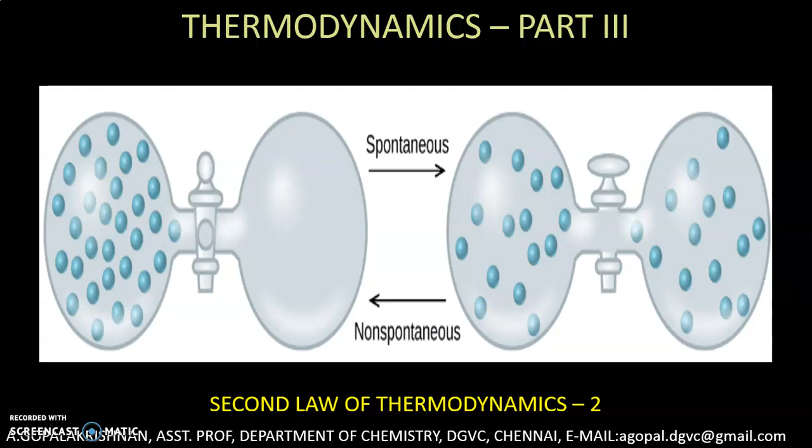In this lecture, I am going to introduce the second statement of second law of thermodynamics called Clausius statement. Actually, we have various statements of second law, but I am going to introduce only a few statements which are very important for our course. Okay, so what is Clausius statement?

See, heat transfer from low temperature reservoir to high temperature reservoir does not occur spontaneously, but using a heat pump we can transfer heat from low temperature to high temperature. But if you want to transfer heat from low temperature to high temperature, you must do some external work.

Suppose consider a heat pump which is operating in a cyclic manner. This heat pump absorbs Q1 amount of heat from the low temperature reservoir, and we carry out some external work so that heat transfer occurs from low temperature to high temperature. Now the heat that is transferred to the high temperature reservoir is actually Q2. Q2 is not equal to Q1. Actually Q2 is equal to Q1 plus the work done on the heat pump. So Q2 is equal to Q1 plus W.

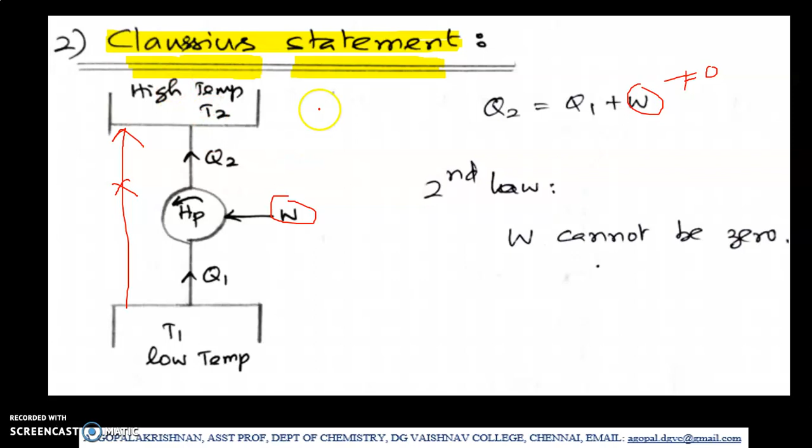Here what second law says is that this W cannot be 0. That means without doing external work, it is not possible to transfer heat from low temperature to high temperature reservoir, from cold end to hot end. Are you able to follow? This is very simple. If you want to transfer heat from low temperature to high temperature, you must do some external work. Okay, this is the Clausius statement for second law of thermodynamics.

Now this is the formal Clausius statement. What is it? It is impossible to construct a device which, operating in a cycle, will produce no effect other than the transfer of heat from a cooler to a hotter body.

See, without producing any effect in the surrounding, it is not possible to transfer heat from cooler to hotter body. That means you have to perform work externally, so that the surrounding loses some energy. So without doing any external work, it is not possible to transfer heat from cooler to a hotter body. This is called Clausius statement.

Now from these two statements, Kelvin-Planck statement and Clausius statement, we understood that in the transfer of heat to work using a cyclic process, you can transfer heat into work, but the work obtained will be less than the heat absorbed. So you cannot convert heat energy completely into work. 100% conversion of heat into work is not at all possible. So heat energy is considered as low quality or low grade energy, because 100% conversion is not possible.

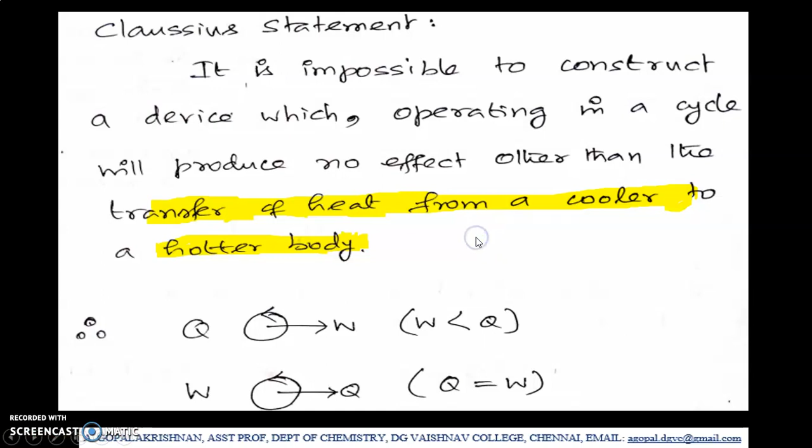Okay, then what is meant by perpetual motion machines? These are all hypothetical machines. Here we have two perpetual motion machines. The first one, perpetual motion machine of first kind. What is meant by this?

There can be no machine which would continuously supply mechanical work without some form of energy disappearing simultaneously. What is the meaning? Suppose I have some machine. If I supply electricity, the machine will convert electrical energy into work. If I supply chemical energy, the machine will convert chemical energy into work, solar energy into work, wind energy into work. Now, without supplying any of these, if a machine can produce work continuously, we call that type of machine a perpetual motion machine of first kind.

But in nature, in practice, we don't have this type of machine. This is not at all possible because this perpetual motion machine of first kind is a violation of first law. What does first law say? That we can convert one form of energy into another form. Without supplying this energy, if a machine can produce work, it means energy can be created. It is the violation of first law, because we know very well, according to first law, energy can neither be created.

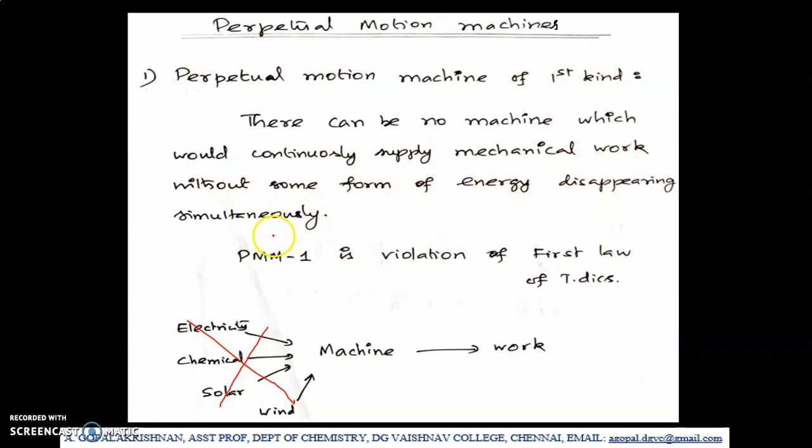Okay, then perpetual motion machine of second kind. What is meant by this? A machine which absorbs heat from a single source and converts it completely into work. Okay, what is the meaning of this? Listen, we have discussed just before. In Kelvin Planck statement, we saw that a machine cannot convert the absorbed energy completely into work. Complete conversion of heat energy into work is not at all possible.

Okay, so a machine which absorbs heat from a single source, that is the high temperature reservoir, and converts it completely into work, this type of machine is not at all possible because perpetual motion machine of second kind is a violation of second law. According to second law, when a machine absorbs heat from one reservoir and if it performs some work, it has to reject the remaining heat to a second reservoir. Using a single temperature reservoir, no machine can work.

Are you getting the point? See, a machine takes heat from one reservoir, performs some work, then the remaining heat has to be rejected to another reservoir. So you require two temperature reservoirs for a heat engine to perform. Okay, so perpetual motion machine of second kind is a violation of second law, so that type of machine does not exist. It's not at all possible.

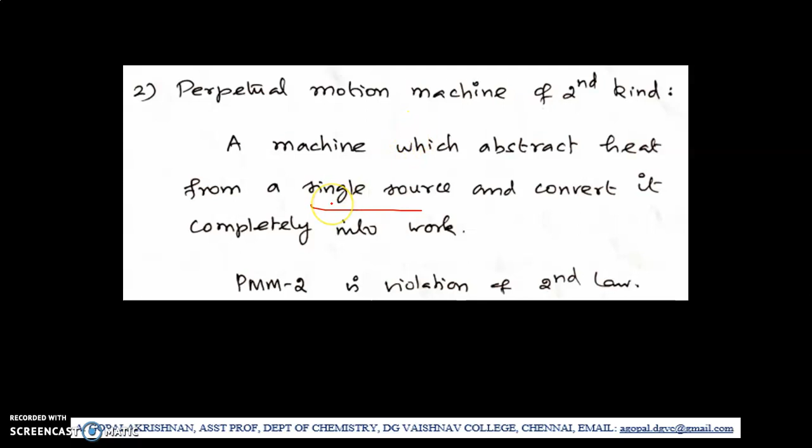Okay, now we have come to an important part of second law of thermodynamics, that is Carnot engine and Carnot cycle. Sadi Carnot proved that efficiency of a heat engine can never be 100%. 100% conversion of heat into work is not at all possible. So no one in the world can make a heat engine which can convert heat energy completely into work. So 100% efficiency is not at all possible.

Yeah, so Carnot engine is actually a hypothetical engine. It is not a real engine. Carnot engine is an ideal reversible heat engine. What is the meaning for the word ideal? Ideal has several meanings. Okay, what is the meaning for the word ideal here?

Listen, during the working of a Carnot engine, if the thermodynamic equilibrium between the system and surrounding is maintained throughout, and if there is no dissipative effect observed during the working of Carnot engine, then we can say that the engine is an ideal engine. Because no dissipative effect means no friction, no other energy loss occurs during the working of a Carnot engine.

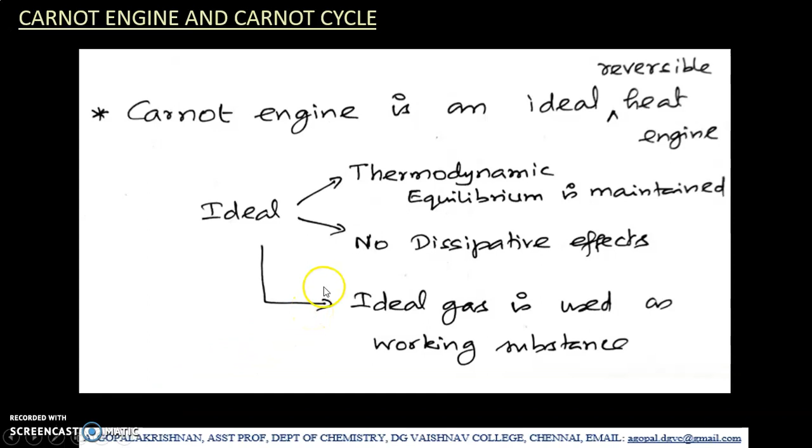Now Carnot engine is working in a thermodynamic cycle consisting of the following 4 stages. What are the 4 stages? See, A to B is a reversible isothermal expansion. B to C is a reversible adiabatic expansion. C to D is a reversible isothermal compression, and D to A is a reversible adiabatic compression.

Here during isothermal expansion from A to B, Carnot engine absorbs Q2 amount of heat from the high temperature reservoir, and the temperature of the reservoir is T2. Then in the stage C to D, that is in the reversible isothermal compression, the engine releases or rejects Q1 amount of heat to the sink, that is the low temperature reservoir. The temperature of the sink is T1.

So it absorbs Q2 amount of heat and releases Q1 to the sink. So Q2 minus Q1 is the remaining amount of heat. That remaining heat comes out as useful work. Okay, so now we are going to prove that the efficiency of the engine is not 100%. Actually this was proved by Sadi Carnot.

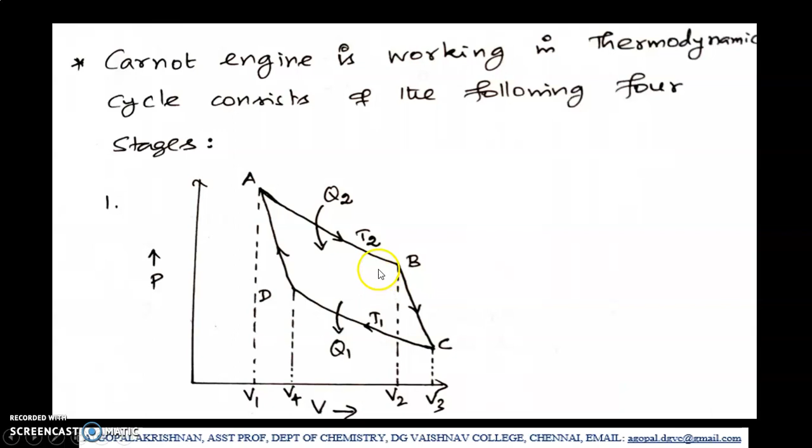Since we took 1 mole of ideal gas here, put N equal to 1. So 1 into CV into, what is delta T? Final temperature minus initial temperature. Listen, what is the final temperature here? This is the initial temperature T2. When the expansion takes place, the system reaches from B to C. At C, temperature is T1. So initial temperature is T2, final temperature is T1. Therefore, in the place of delta T, I'll put T1 minus T2. This is the work done during reversible adiabatic expansion.

Then here remember T2 is the higher temperature because it is the temperature of the source. T1 is the temperature of the sink. Since T2 is larger, this quantity will be negative. Yes, W should be negative here because expansion occurs, right?

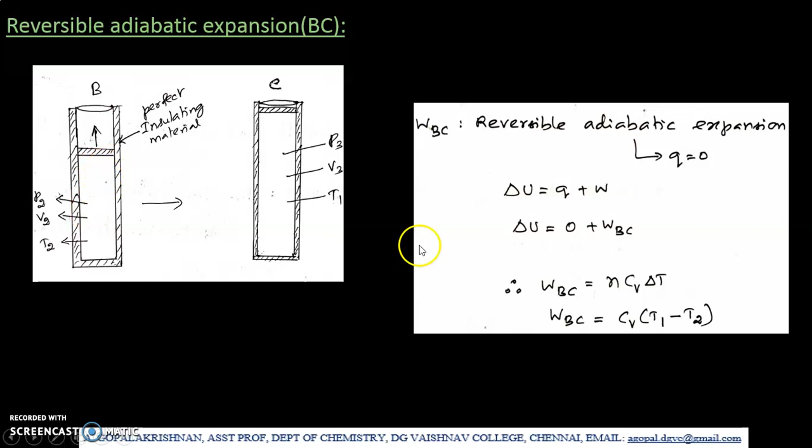Then the third stage, reversible isothermal compression. What you have to do now is remove the insulation, and now I am going to compress the gas by keeping the cylinder over another temperature reservoir whose temperature is T1. Keeping the temperature as such, I am going to do compression. As you compress the gas, to maintain temperature constant, the gas has to reject heat to the reservoir.

So when you do compression, the pressure of the gas changes from P3 to P4, pressure actually increases. Then volume changes from V3 to V4, volume decreases, but temperature remains constant because it is an isothermal compression. And Q1 amount of heat is rejected to the sink. Now what is the work done during this process? In this process, the work done is WCD.

Listen, since it is isothermal, change in temperature is 0. When change in temperature is 0, change in internal energy for ideal gas should be equal to 0. So delta U is 0. This is reversible isothermal compression. And since delta U is 0, this becomes 0 here. What is Q here? Q is the heat rejected, so Q1, and W is the work done, WCD. Therefore Q1 equal to minus WCD.

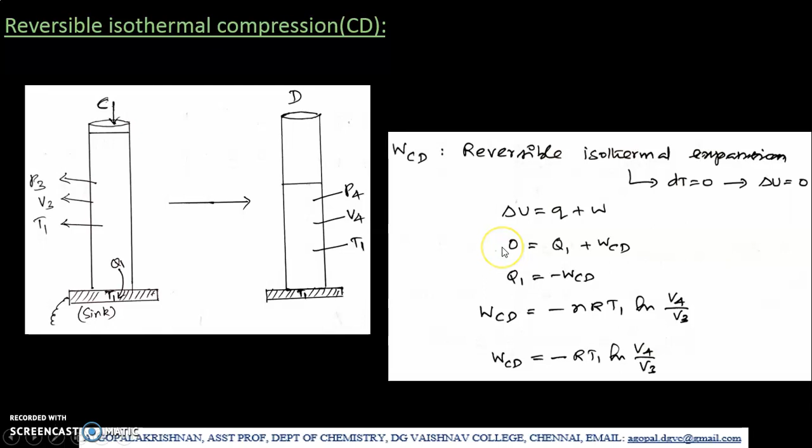Next, the last one, reversible adiabatic compression. Now again, cover the cylinder with a 100% perfect insulating material. Then carry out the compression again. When you do compression, what will happen? The pressure increases further and it reaches the initial stage P1, and the volume decreases and reaches the initial one, V1.

And temperature: since we are compressing the gas, work is done on the system, so work energy is transferred to the system. Therefore, the internal energy of the system increases. When internal energy increases, automatically temperature increases. So the system goes from low temperature T1 to a high temperature T2. So what is the work done in this process?

Since it is a reversible adiabatic compression, adiabatic means Q is 0. So according to first law, delta U is equal to Q plus W. Since Q is 0 here, delta U should be equal to WDA. And how to calculate W? Listen, for ideal gas, change in internal energy can be calculated using the formula NCV into T2 minus T1. Why T2 minus T1? Because here final temperature is T2, initial temperature is T1.

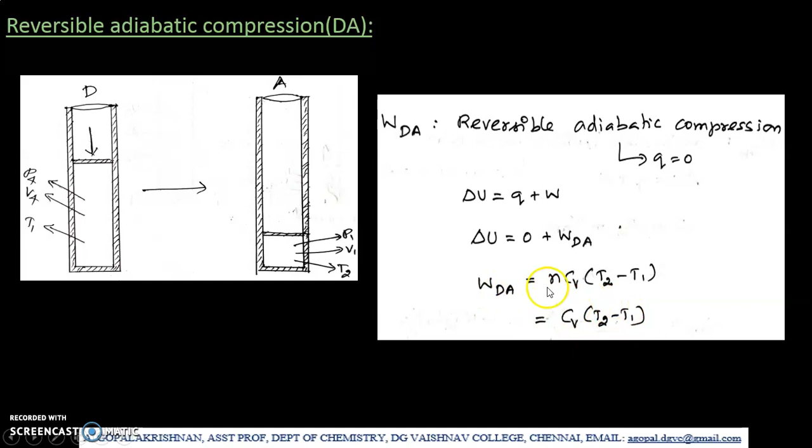And we took 1 mole of gas here, so n is 1, therefore you will get this expression. So this is the work done for this stage. Okay, now, so what is the total work done? Total work done is nothing but WAB plus WBC plus WCD plus WDA. So take all the expressions, substitute here.

Now see here, here we have CV into T1 minus T2. Here we have CV into T2 minus T1. So if I take minus as common here, I'll get T2 minus T1, but minus and plus get cancelled. So we can cancel these two. Okay, so we'll get minus RT2 ln V2 by V1 plus RT1. Here I'm changing the sign, minus sign becomes plus.

Okay, so when you change the sign, what will happen? V4 by V3 becomes V3 by V4, simple. So you'll get RT1 ln V3 by V4. I'll take this as equation number 1. Now, we know very well B to C and D to A, they are adiabatic steps. For adiabatic process, we know very well T V power gamma minus 1 is a constant.

T V power gamma minus 1, this is a constant. Therefore, at B, the temperature is T2, volume is V2. So T2 V2 power gamma minus 1 equal to, at C, temperature is T1, volume is V3, so T1 V3 power gamma minus 1. Since they are constant, these two quantities should be equal.

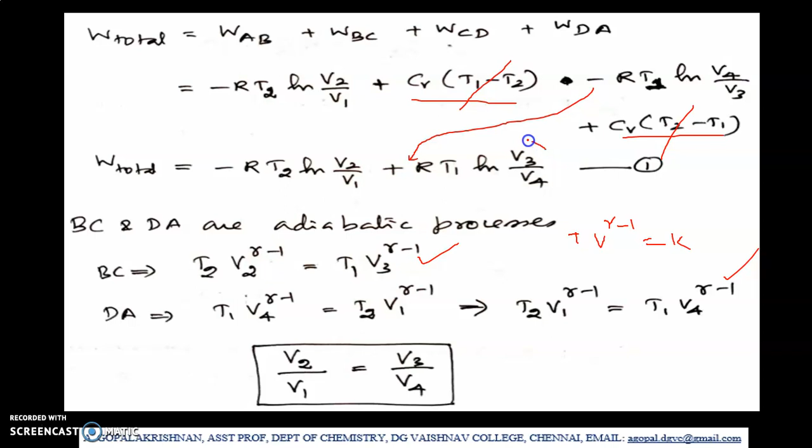So now V2 by V1 is equal to V3 by V4. So in equation 1, in the place of V3 by V4, I am going to substitute V2 by V1. So what we'll get is, listen, the total work done equal to minus RT2 ln V2 by V1 plus RT1 ln V2 by V1. Now see here, R ln V2 by V1, R ln V2 by V1, these quantities are equal, right? So I'll take those quantities as common, including the minus sign.

So minus R ln V2 by V1 into, here I'll get positive T2 and this becomes minus T1. So this is the net work done. Now we are not interested in sign, we want only the magnitude. So what is the magnitude of the work done? Just remove the sign. So R ln V2 by V1 into T2 minus T1. This is the net work done by the system. I'll take this as equation number 2.

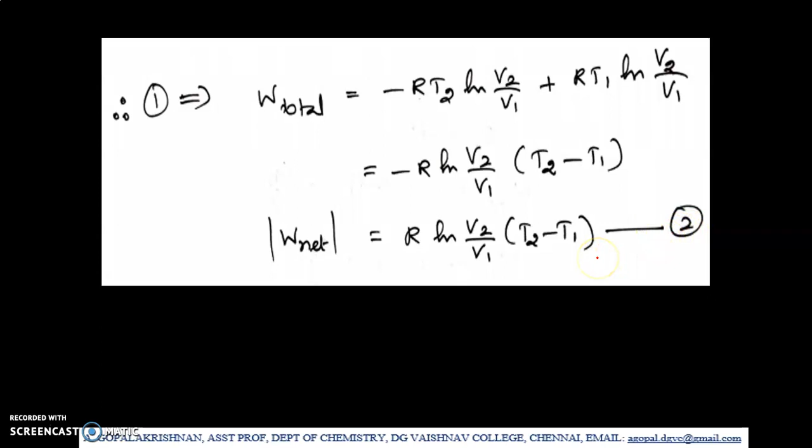Now how to calculate efficiency? Efficiency is nothing but net work done by heat absorbed. So net work done is R ln V2 by V1 into T2 minus T1. And what is the heat absorbed in the first stage? Heat absorbed is Q2, which is equal to RT2 ln V2 by V1. So by cancelling R and ln V2 by V1, you will get the final answer as T2 minus T1 by T2.

You can separate this as T2 by T2 minus T1 by T2. T2 by T2 is 1, therefore I can write 1 minus T1 by T2. This is the efficiency formula which we derived using Carnot cycle. Now listen, what is T2? T2 is the source temperature, higher temperature. T1 is the sink temperature, it is lower temperature. Since T2 is greater than T1, this quantity will be always less than 1.

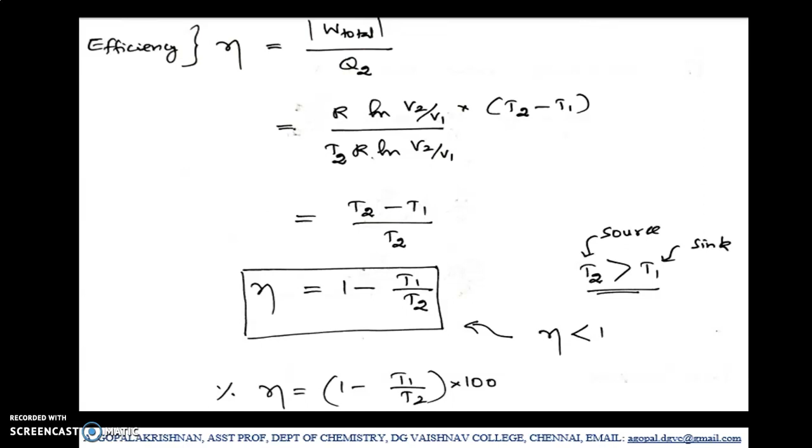So since it is less than 1, if I subtract this quantity from 1, we will get efficiency as less than 1. So efficiency of a heat engine should be always less than 1. So Carnot proved that even if you use an ideal reversible heat engine, it is not possible to get 100% efficiency. So this is the conclusion that we arrived at using Carnot cycle.